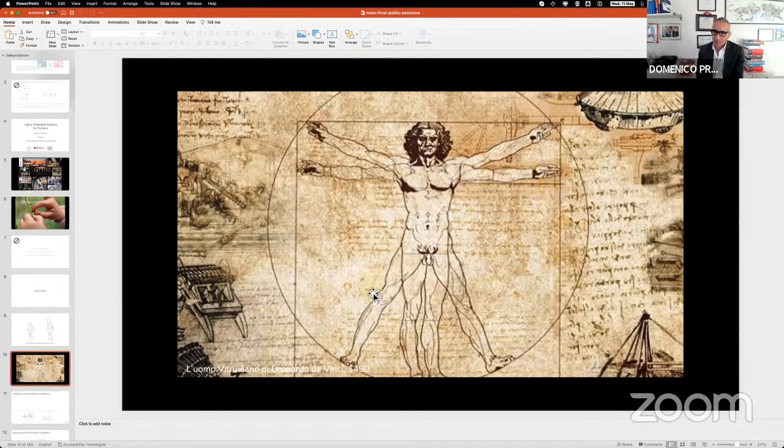Over thousands of years... this is L'Uomo Vitruviano by Leonardo da Vinci, which dates back to 1490. And Leonardo da Vinci is actually from 60 kilometers from Siena; Siena and Florence are very close to each other in Italy. So you see, the legs, the anatomy of the body, is exactly the same for hundreds of thousands of years. So we, as technologists dealing with robotics, need in some sense to think about augmentation of the body, not only augmentation of cognitive capability.

We want to become enhanced in terms of the ability to do things. And in some sense, the extra finger I was presenting in yesterday's lecture is a sort of augmentation. It is an extra finger, something that we didn't have before, but we can have with human body augmentation, limb augmentation. So what are we talking about? We are now talking about another kind of intelligence. Not cognitive intelligence, but bodily intelligence.

There are many types of intelligence, from emotional intelligence, cognitive intelligence, the ability to do mathematics, the ability to do art. There is something related to the body. Maybe there is someone who has very accurate skills in manipulating the fingers and making a piece of art with their hands. There are people who are able to dance and are very good at moving. This is bodily intelligence. Bodily intelligence deals with the ability to move the body.

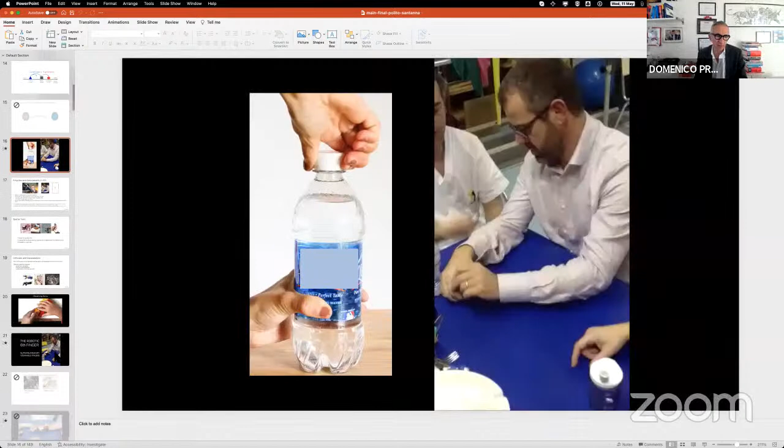Okay. So this means that in this concept of the extra finger, of course, the extra finger is maybe too simple to have all this intelligence, no? But in this extra finger, the way the robot closes depends on how the human moves his limb. So here there is an intelligence that adapts over the days to what the human is doing.

Okay, so if this robot has, let's say, 5 degrees of freedom, 5 parameters, maybe the human is controlling only 1. The other 4 are automatically adjusted with an intelligence that I call primitives of the motion, that adapts to the human body. So the sensory motor interface, in the light of augmentation, really tries to mix the bodily intelligence of the human and the bodily intelligence of the robot.

So we are quite successful, and of course, here, the immediate application of this concept of augmentation is for impaired humans, because for impaired humans it's simple, no? You don't have one arm, I will give you an additional arm that in my vision can be also grounded, not only wearable. Why not only wearable? Because wearing a robot, when the robot becomes an arm, the human should bring with him the heaviness of the robot.

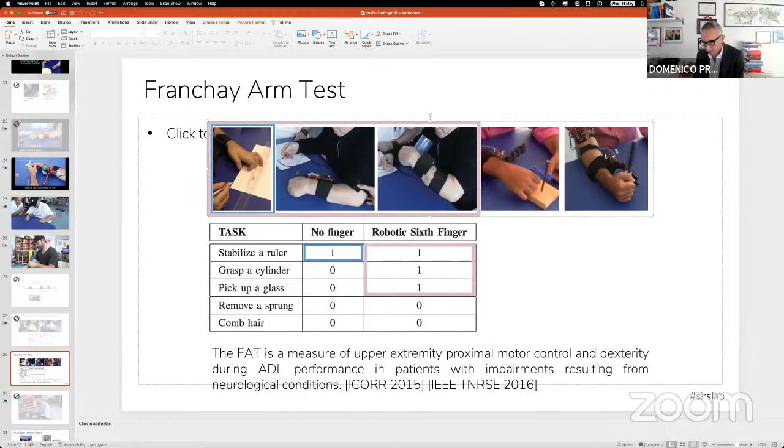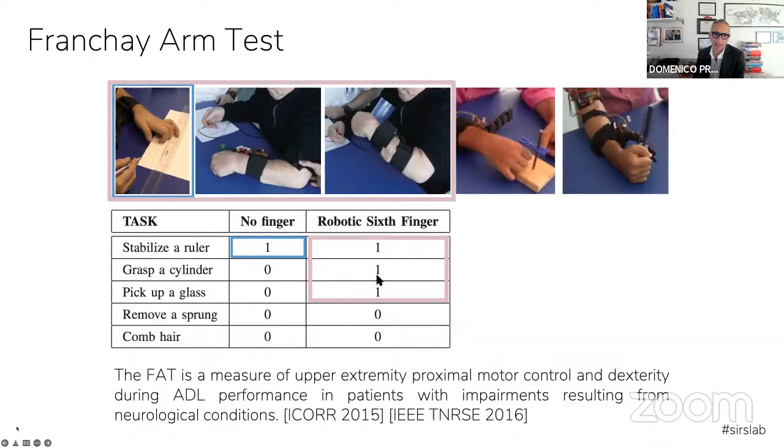For example, people with impairments without the extra finger were only able to stabilize a ruler. They were not able to grasp a cylinder. They were not able to pick up a glass. And this was possible with the robotic extra finger. We already saw this yesterday.

The big concept that I'm presenting here is the main difference between cooperation and augmentation. The old story of cooperation is that you have a human with human limbs, you have a robot that is completely autonomous, and you do a cooperative manipulation task. In augmentation, you have an interface that connects the human to the robot, so the human takes control of a part of the robot and does the task in an augmentative shape. So in some sense, the additional sensory motor interface makes the augmentation possible.

Is this concept clear? The big difference between cooperation and augmentation? Can I have some comment from you? I think so. Yes, sir, clear. Clear, sir. Yes.

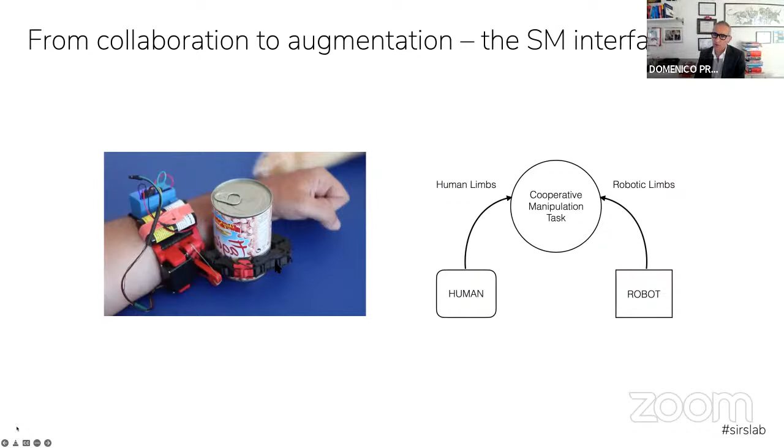So the big difference: cooperation means that the human does not control the robot at all, and both of them do the task. If the finger was completely autonomous, without any ring interface, without any sensory motor interface, this was just pure cooperation. If you add the ring, so I can control the robot and feel the robot, then this is augmentation, because I feel augmented with this robot.

For me, the interest that I have in augmentation is impressive, because I think there are many open problems for people doing AI, because we are talking about mixing the two intelligences, the two bodily intelligences. I have a question here, maybe. Okay, the concept is clear.

Thanks a lot. Now, before going to the lecture on grasping, let me show you something that was not discussed yesterday. This is another example of a sensory motor interface. This is also very interesting.

Because you have a lady that has an impaired arm, and she wants to use the remaining biological arm to do the task with the robot, like pouring the water, but she wants an interface that directly controls the robot, to feel the robot as an extension of her body. And she's using a part of the body that is not involved in the task.

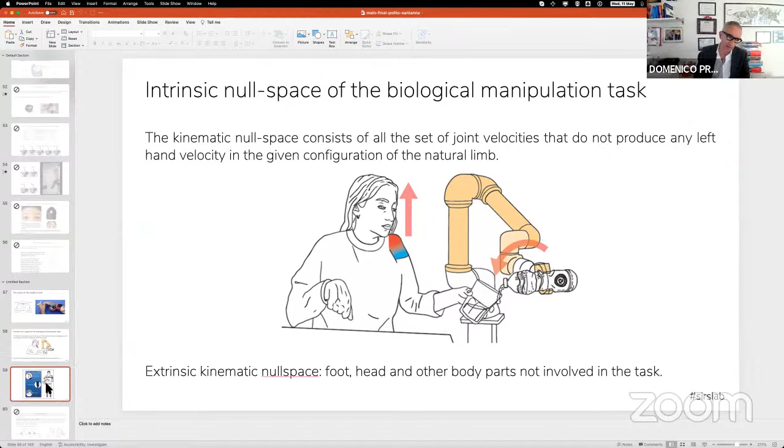The interface can be of 3 types, and we are working on that. So the interface, that is the very important part of the story. The interface here, this is the interface. It recognizes an action of the human that becomes the reference for the controller of the actuation of the robot. The robot has sensors on it that are feedback on the perception system of the human.

Example here, the human pushes this switch, so this is the action. This is recognized by the electronics here and starts the motion of the robot, okay? So this action is connected to the robot actuation. The robot has a force sensor here, okay?

This force sensor measures the interaction with the object, so it senses the force that is provided back as a stimulus on the human body by squeezing the finger through this cable. So there are motors connected to this sensor that stimulate the finger. So the action is recognized and translated into a motor activation. The sensor measures something and provides feedback through another motor on the human body that provides the haptic feedback. For me, this is the most interesting part of human augmentation.

This, for example, okay? Take this example. So there are 1 hand, 2 hands, 3 hands working on the same object, okay? So the mathematics behind this complex manipulation, that is probably the most advanced action of the bodily kinesthetic intelligence, means to cooperatively operate with a single object.

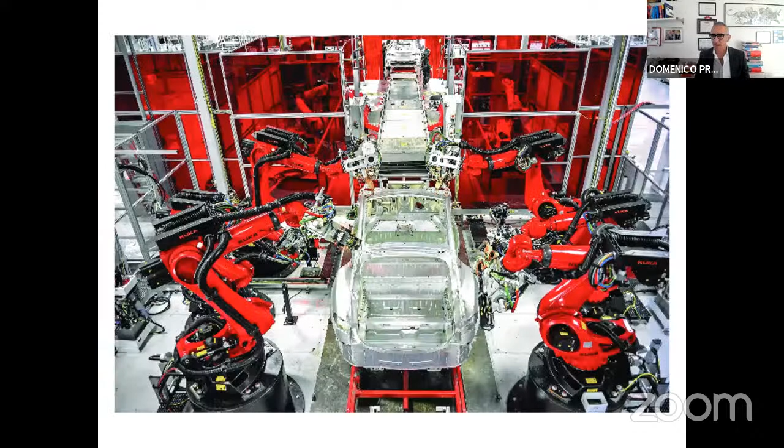So we will talk about robotic manipulation, but we are talking about many robots collaborating on the same car. We are talking about humans and robots in an augmented fashion. It is exactly the same mathematics, okay? But because traditionally we were working on robotic hands, the mathematics, the model behind is represented onto robotic hands, okay?

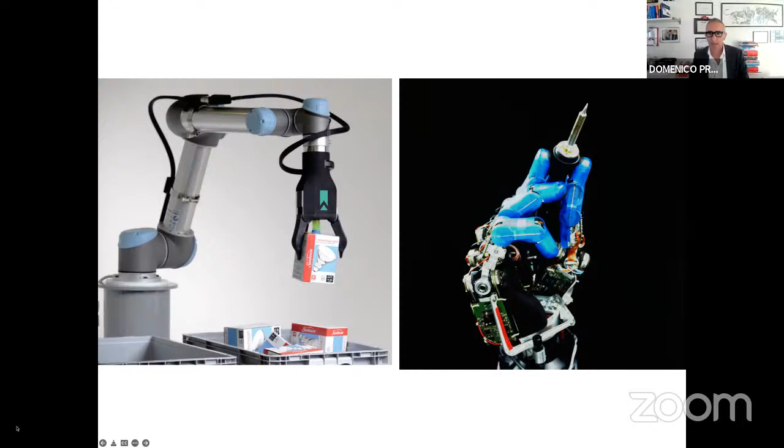Most of the work that I'm going to present is published in this, I don't know if you can see here. This is the Springer Handbook of Robotics. I don't know if you know it. The people that are doing robotics probably know. I have a chapter in that book, and the chapter is called Grasping. The book I'm talking about is Robotics Handbook Springer.

This is the book I'm talking about, and I wrote for this handbook a very detailed chapter on the arguments that I'm going to touch today. Of course, I will touch some important part of the book. You see here, these are the chapters. I'm looking to my chapter.

This is my chapter, Grasping, that I wrote with Jeff Trinkle, a colleague from US. This chapter introduces fundamental models of grasp analysis. So there is no technology here. It's only math. And you can have a look at it in case you want to have more information about it.

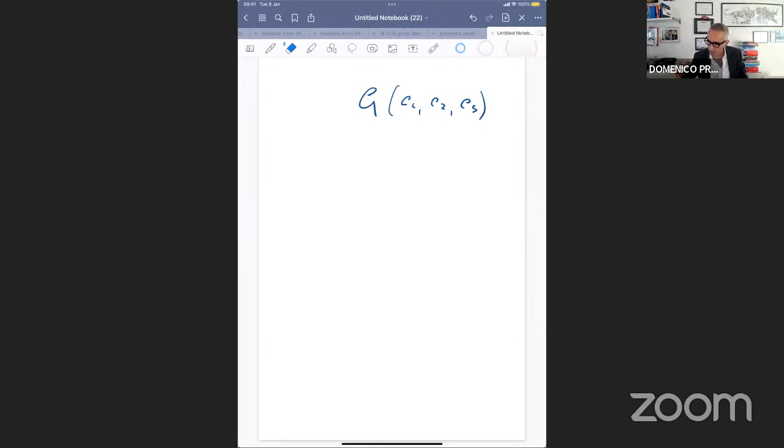So the grasp matrix is a matrix G that depends on the contacts C1, C2, C3, C4, C5. I mean, this is generalized. If I have 5 contacts, I have 5 contacts, right? It is a linear map from the contact forces to the controlled force. So you have that the controlled force, the red one that you can control, is equal to G, the grasp matrix, times FC1, FC2, FC3.

What's the dimension in this case? This is a three-dimensional vector, this is a three-dimensional vector, this is a three-dimensional vector. So this is a 9 by 1 vector, right? You put one on top of the other. So this matrix has for sure 9 columns, okay? Because it has to multiply the vector. How many rows does it have?

As the forces, actually, it has also the controlled moment that is 0. This is the external wrench control that is part force and part moment. For example, in this case, I'm also controlling a moment because it's rotating, okay? So I'm controlling the net force on the barycenter of the object plus the net moment on the barycenter of the object. So this is 3 forces and 3 moments, okay, about the axes X, Y, and Z.

So this is the external wrench, which is equal to FC, MC, and this is 6 by 1. So this matrix has 6 rows. So G belongs to the real 6 by 9 matrices. Okay, right? So in a grasp control problem, you have, sorry, WC is given.

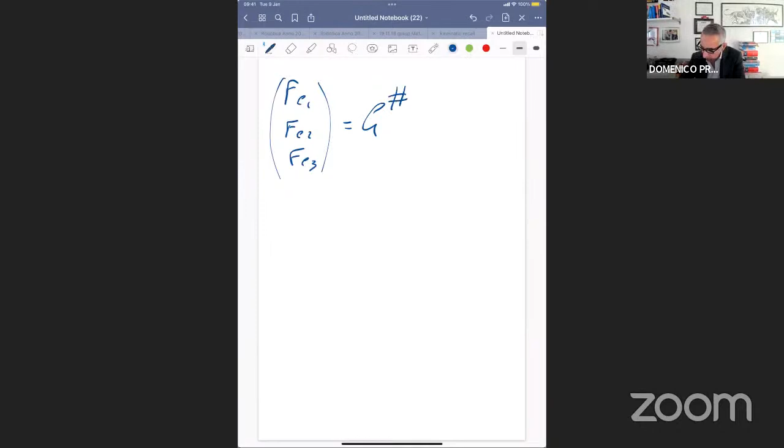The robot needs to know which forces it should apply with the fingers in order to resist the external wrench, okay? So you need to solve this linear system. So FC1, FC2, FC3 is equal to, please remember the solution of the linear system, G pseudo-inverse times WC, that is given, plus... Do you remember how many equations you have here? You have 6 equations, right?

Because these are 6 equations in 9 variables. It means that you have infinite solutions, right? Because you have 9 variables for 6 equations, you can find infinite solutions. So these infinite solutions are represented by the null space of G, the base matrix of the null space, times xi, that is the parameter 3 by 1 that represents the domain of the null space.

The fact that you have infinite solutions is super important, it is the most important thing in grasping, because you can find among all the solutions the one that satisfies the contact constraints. So the force that you find should satisfy the contact constraints. So from the infinite solutions for FC1, FC2, and FC3, you take the one satisfying the friction constraints.

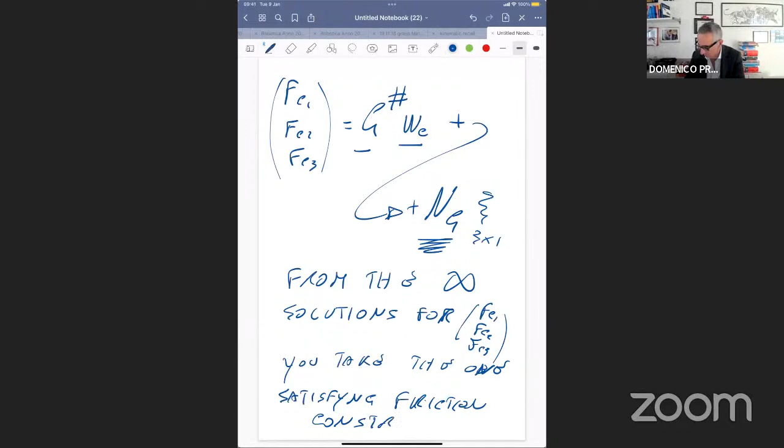In the sense that, if this is the block and you want to resist this force, you have these three contacts, 1, 2, and 3. For sure there is this combination, 1, 2, and 3, such that the sum of these is equal to this, right? This is a possible solution. This is the barycenter, this is the gravity. Is it a solution? No, because you have to stay in the friction cone, and only this one is in the friction cone. So this is a solution, but it's not a solution that solves the problem.

You need to find another solution that I'm just showing. Among the infinite solutions, you have to find probably this one, 1, 2, and this is larger, so that the sum of these three forces, 1, 2, and 3, generates the exact opposite to this. So this should be, of course, aligned. This red one is the one that you find among the infinite solutions. Is the concept clear? I don't want you to go into this detail, but the concept is clear. Among the infinite solutions for the forces, you need the ones that satisfy the constraints on the contact force.

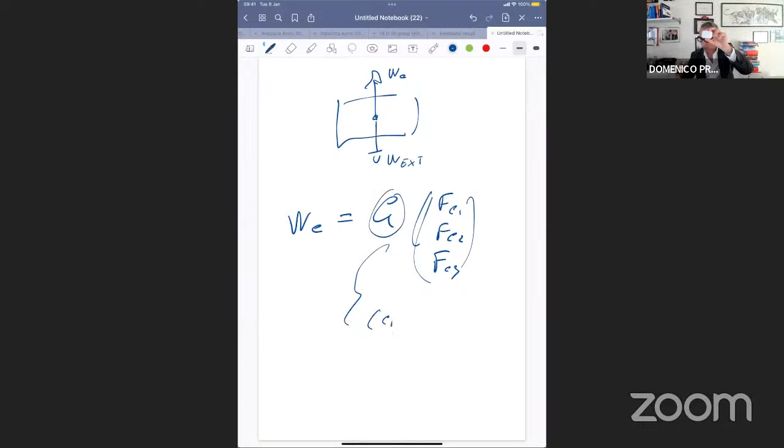And the grasp matrix is a function of contacts, C1, C2, and C3, right? So given the contacts, solving this equation, you find the contact forces that you need to apply, okay? You have infinite solutions, I explained before. You use this infinity to satisfy the contact constraints. So from WC, you compute FC1, FC2, FC3 with linear algebra, okay? From FC1, FC2, and FC3, you multiply by the Jacobian hand transpose, and you get the torques that you need to apply to the joints, okay?

The two main equations are WC is equal G FC, where FC takes all the three contact forces together, and the other one is tau that you want to control at all the joints is equal the Jacobian of the hand transpose times FC. So given WC, that is a function of the external wrench, from this equation you compute the contact forces, and from the contact forces, by multiplying by this other matrix, you find the torque that you need to apply to the joints. And the torques are proportional to the current.

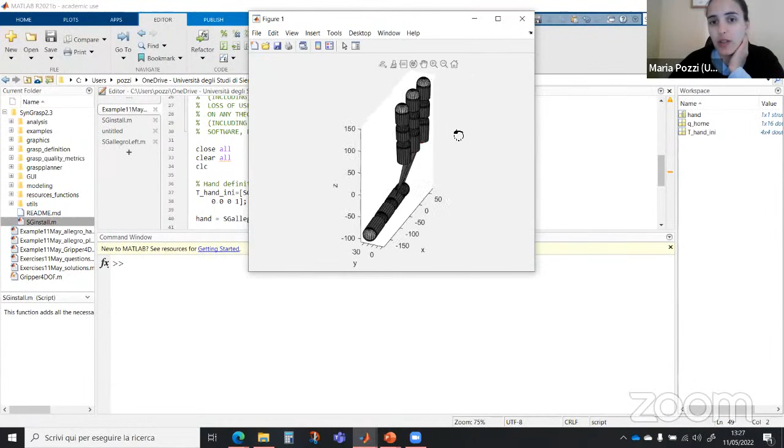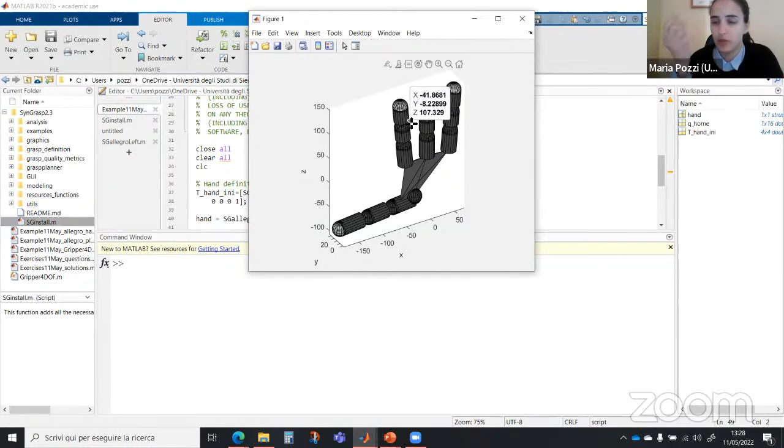Okay, and here you see that when the hand is not moved, it is fully stretched. All the joint values are 0, so all the joint positions are 0. This hand has joints that allow the closure of the fingers, and also the rotation of the fingers around their axis, for example. Anyway, this is what we get when the hand is not moved. And then if we move the hand by using SG move hand, we get the hand closed.

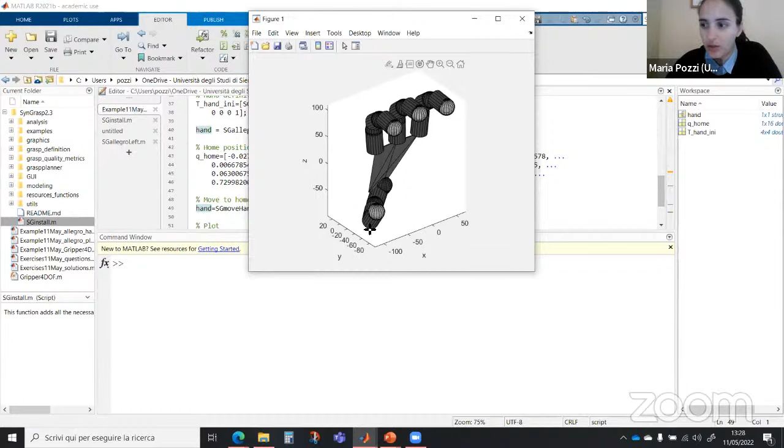So I'm going quite slowly, even though these are functions that are doing quite simple things, but these are very important. And above all, you have to remember these important functions. Okay.

Another thing that we were saying before is, let's suppose that we want to define a grasp. Suppose we have this real hand that grasps an object, and we know where the contact points are, and we want to analyze this grasp. So we can write grasp definition. What we can do is to use the function SG add contact, but suppose we don't know how it works. So we say help SG add contact, and it tells us what this function does.

Okay, so the usage is the following. Let's copy paste it, and then we talk about it. So we have several arguments taken by the function SG add contact. First of all, it's the hand on which we have to add the contact points. Then we have to say the type of contact point. What does type mean? I'm not sure whether you already saw it or not. If not, it's not fundamental that you perfectly know these things now.

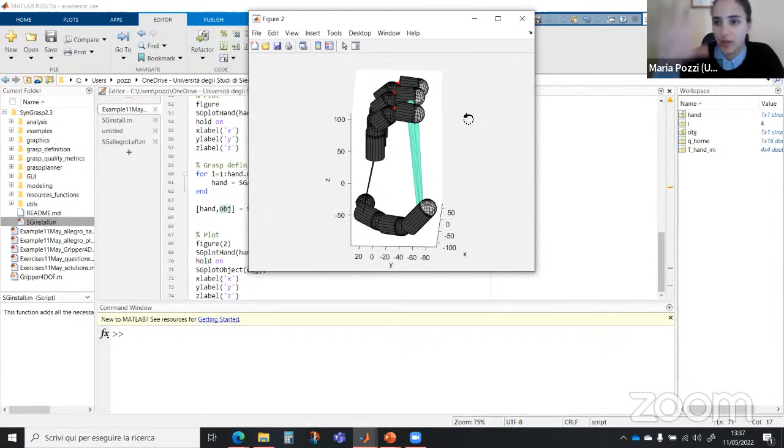Okay, but what happens with this function, sgplotObject, is that the function automatically defines an object based on the contact points. So we have defined the contact points here, on the fourth phalanx. That is actually the last phalanx. It's the fourth because we have one dummy phalanx at the base of the finger, but okay, never mind. So here you have the contact points in the middle of the fourth phalanx, which is the last phalanx. Even if you see 3 phalanges, actually there are 4 because there is a dummy phalanx, as I was saying.

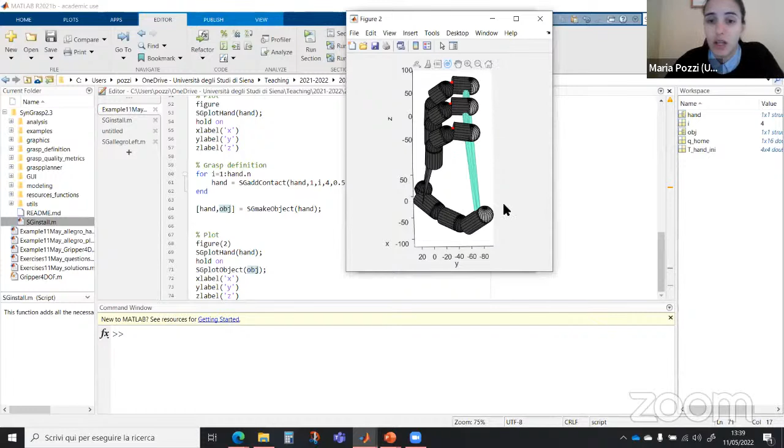And basically, this function sgMakeObject actually draws a virtual object between all the contact points. This virtual object is useful, first of all, to see whether we placed the contacts in the right points, okay? And it's okay because we wanted it to be in the middle of the last phalanx, okay? Then it's nice because it allows us to do some grasp analysis.

Why? Because once you define this object, you also define a full structure of the object, including the G matrix. Okay. So we have object.G, that is the G matrix, and hand.J, that is the hand Jacobian. Okay. I think you saw with the professor that the G matrix has this structure, identity, and then under it, it has the skew matrices. Okay. So if we look at the slides, I told you it's very important to know the slides.

So the size of the grasp matrix, if we are in a 3D case and there are no strange cases, is always 6 by the number of contacts times 3. So we have 4 contacts times 3, that is due to the contact model, and it's 12.

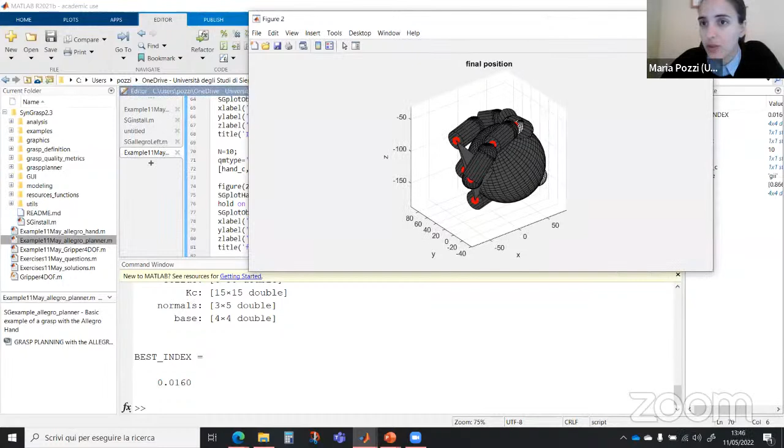Sorry, but I cannot move the figures. Due to the interface of Zoom, I cannot really move the figures. Oh, here it is.

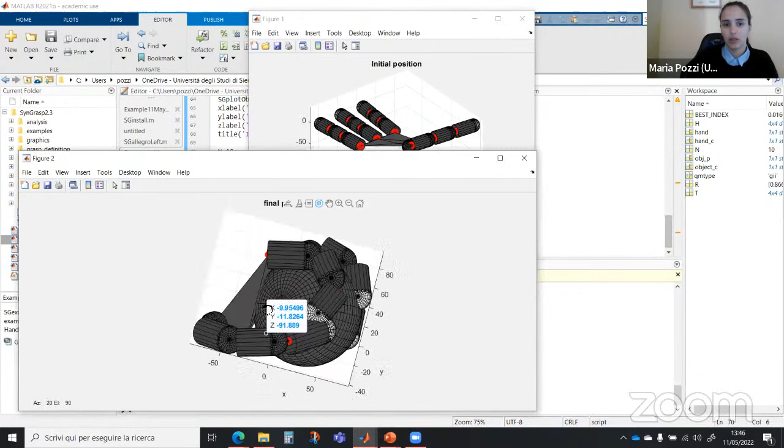Okay, so we have the initial configuration of the hand open over the object, okay? And then we have the final configuration in which the hand is wrapped around the object. Okay. And this was computed automatically by our grasp planner. How? According to the index that we told the grasp planner to optimize.

And then the grasp planner gives as output the final hand, which has a certain matrix of contacts, and also the final object, which actually is the same as before. So the object is the same because it's still the sphere, but the structure of the object changed because now we have a G matrix coming from the contact point matrix. Okay, so the object is always the same, but the structure describing the object now is changed because we have a grasp.

And then we have an index, the index of quality. Okay. Of course, you can get better results if you do more attempts.

Okay, I think that's more or less it from this more practical part. Please, if there is anyone that already tried, please let me know. Otherwise, if you have comments and questions later on, maybe you can let us know.

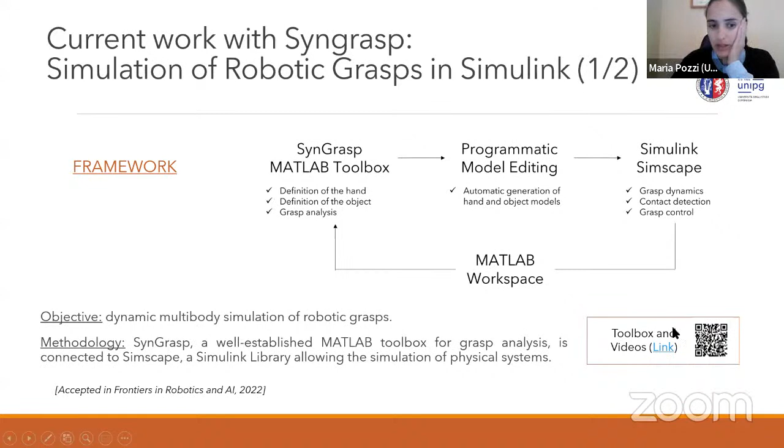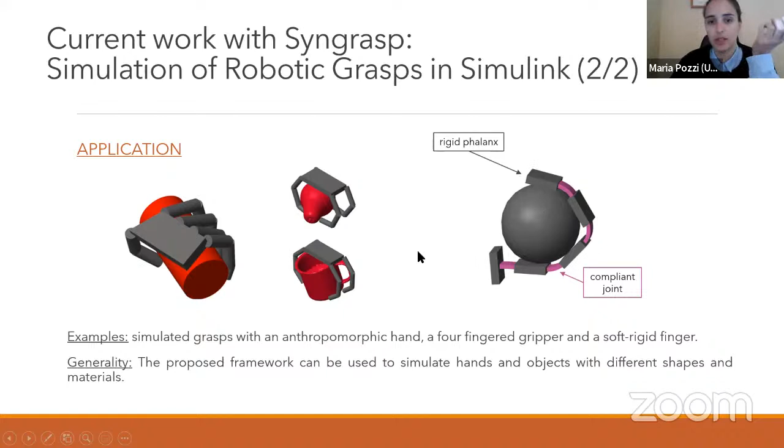These are examples of experiments that we performed with the simulator. Here you see the anthropomorphic hand that we saw in the previous slides, at the beginning of the lecture. Here is the exact same hand, but in Simscape. So here we are also simulating the fact that the hand has a mass. Each finger of the hand has a mass and a certain shape and so on. As future work, we want to implement not only rigid materials, but also compliant materials.

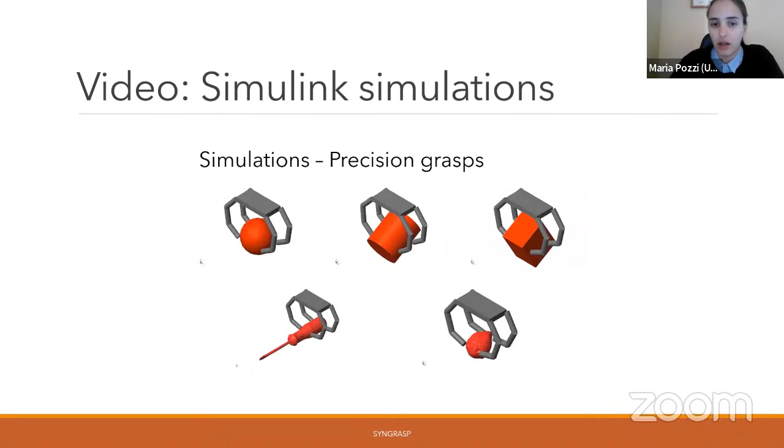Here are other examples of grasps. You see that, for example, even here, the object is wrapped around by the hand, and also here. Okay.

So our future work includes the inclusion of other standard object databases, the simulation, so inclusion of functions for the simulation of soft robots, other educational resources, and also the implementation of a few functions that allow us to control the hand synchronously, directly with ROS. I mean, we did it already for a few works, but we didn't yet release the functions.